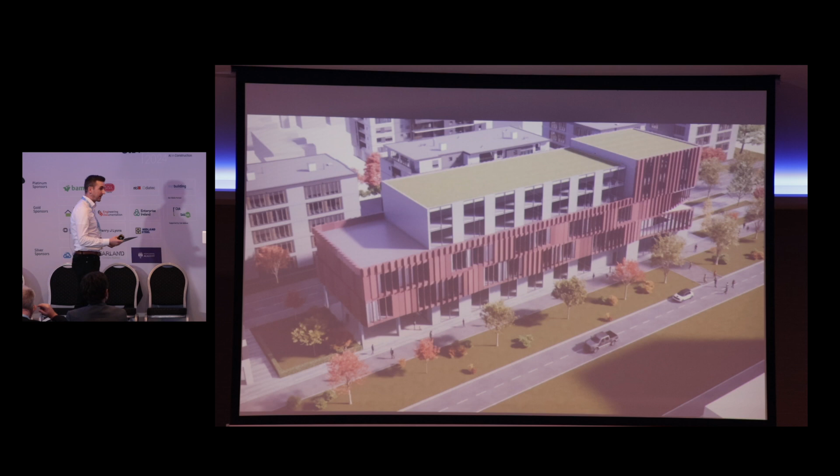The video won't play, but I'll talk over it anyway. What it does is bring additional realism to people's faces. If you're familiar with Enscape, one of my pet peeves is that people look too CGI, which makes the image look unrealistic. The AI enhancer completely changes that - it brings a complete human look to visualizations and architectural renderings. It will also do it for things like grass, vegetation, and other entourage in the image. That's just a little additional tool that sits within the Enscape plugin inside Revit.

So I'll skip ahead with that video. Now to look at some other integrations, particularly from an automation perspective but also with some AI integration - looking at other Autodesk tools like AutoCAD, Revit, and Civil 3D. You may have noticed in the last 12 months or so that they've integrated feedback - I get this email, I think on a weekly basis, telling me what tools or pieces of software I've used inside Revit, AutoCAD, or whatever particular Autodesk tool. This is something called Autodesk My Insights, and it works across those three main Autodesk tools.

Effectively, what it does is allow you to receive actionable recommendations, whether you're an architect or designer, recommending tools you might be able to use in addition to ones you've used that week. When I say tools, I mean actual functionality inside the software. It identifies different pieces of software you've used, and uses machine learning and AI to provide those recommendations at the end of your week, inside your Autodesk panel.

That's already built into the software. You'll see it appear like this when logging in - in this case for AutoCAD, for example - giving you recommendations about new tools. So that's already in the product, using machine learning and AI as well.

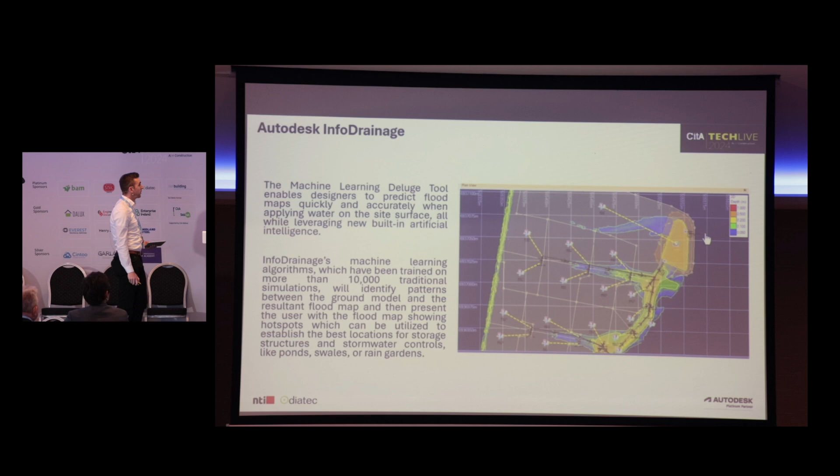Another one is Autodesk InfoDrainage, which uses machine learning in its Deluge tool. This enables designers to predict flood maps quickly and accurately when applying water on the site surface, all while leveraging the built-in AI inside InfoDrainage. It uses machine learning algorithms that have been trained on more than 10,000 traditional simulations, which identify patterns between the ground model and resultant flood map, then present the user with a flood map showing hotspots.

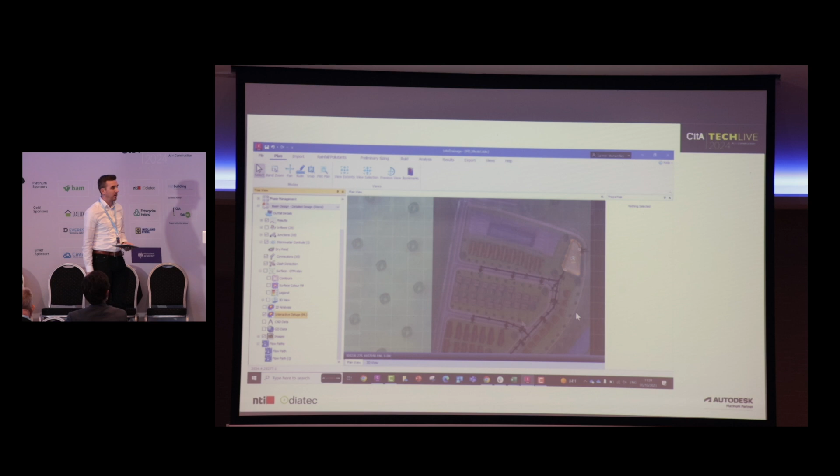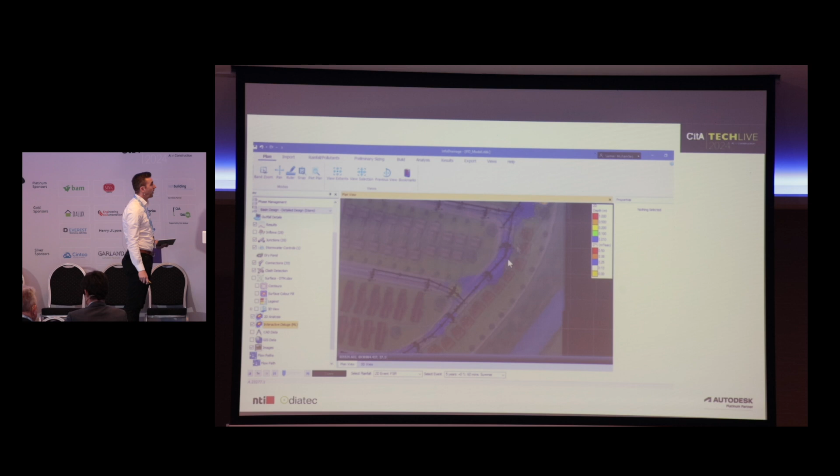So you'll see a little demonstration of this. What you have in the corner there is a dry pond, and then the interactive deluge being moved to identify the different flow of water from that. You'll see that now as the dry pond gets moved.

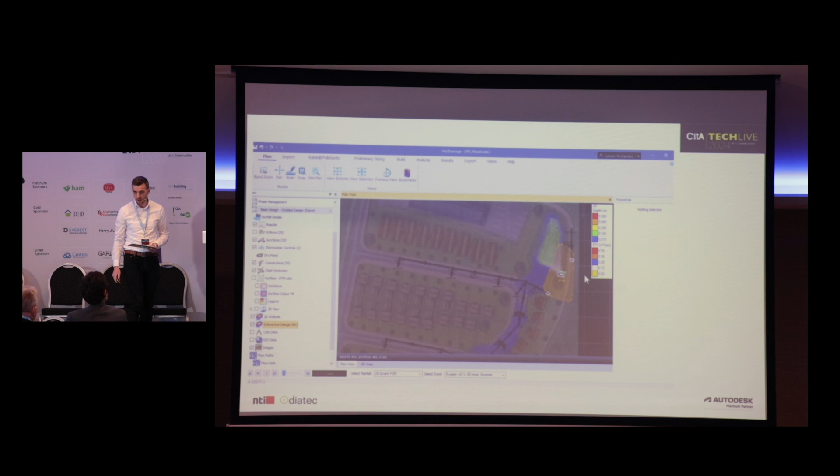So that gets moved, and then you'll see the analysis still happens on the calculation, still checking on the flood path from that particular asset or that particular area of the site. So that's inside InfoDrainage.

To go into other products then, so Autodesk Build and AI, some of the integrations in that. If you're an Autodesk Build or Autodesk Construction Cloud user, you may have seen the Photos module inside ACC or Autodesk Construction Cloud.

This uses the photo tags and AI then to automatically add tags to metadata. So what actually happens is when you upload your photographs, if you're working on an iPad on site, you're performing inspections or commissioning checklists, you're executing a form on the iPad, typing in whatever information you need, and then you add some photographs to that form.

And then now my photos are now available in ACC. That's fantastic, photographs go into one location. So on my iPad then I can access those photographs or go back into my web browser. But what actually has been added to those photographs automatically as soon as I took them, it takes a couple of minutes, it identifies items inside that photograph.

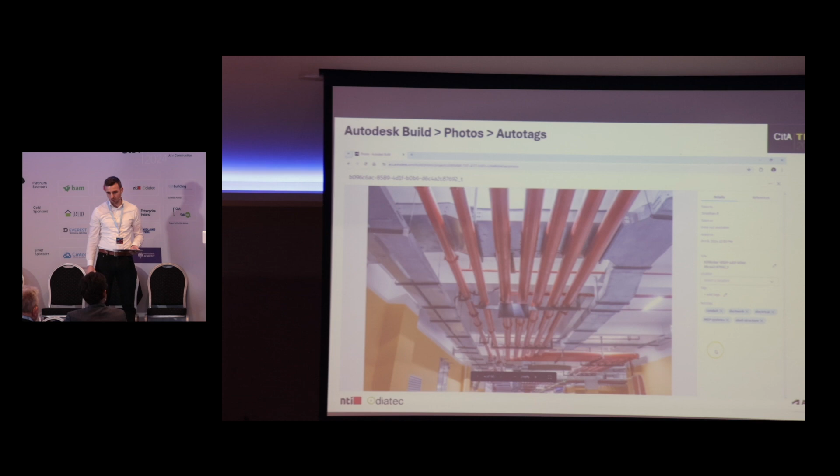So all of those tags that you see on the right hand side, they're all automatically identified from the photograph through AI. It recognises that's an opening and a window, fairly low quality image. You can see that's MEP systems, that's steel structure, ductwork, etc. So these are all the photographs taken on site via an iPad device, and then the AI recognises different parts or different elements inside those images.

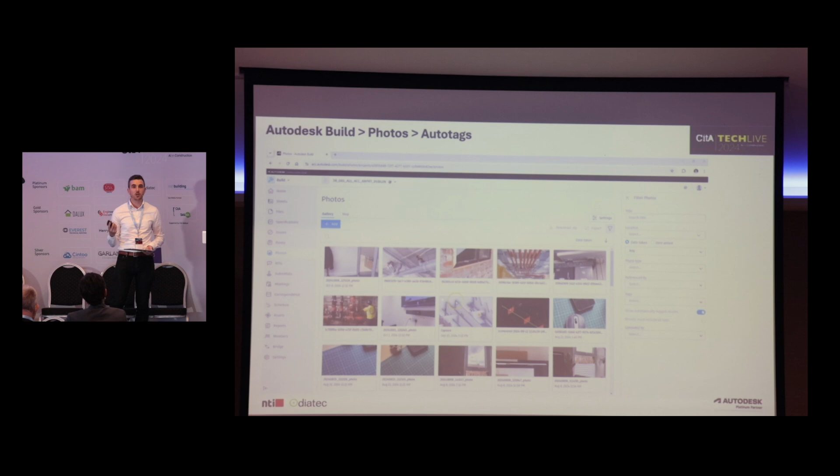What that means, great, it adds tags, but I suppose what's the benefit of that? It means then that you can actually search by those tags and search for particular items. You may be on a complex project, photographs build up to thousands or tens of thousands easily on any construction project. So then I can search by those auto-generated tags, and I can filter that on or off as well. So there it will find me those images, particularly for baseboard finish.

Or my skirting board, as I prefer to call it. So that's Autodesk Build and the photo tags, which is AI.

Autodesk Build, then Construction IQ. This has been around for a couple of years. I think it may have been mentioned possibly by BAM this morning, I can't remember. I've certainly seen BAM talk about this previously and about the benefits of this. So Construction IQ has been around a while. This is a machine learning dashboard inside Autodesk Construction Cloud.

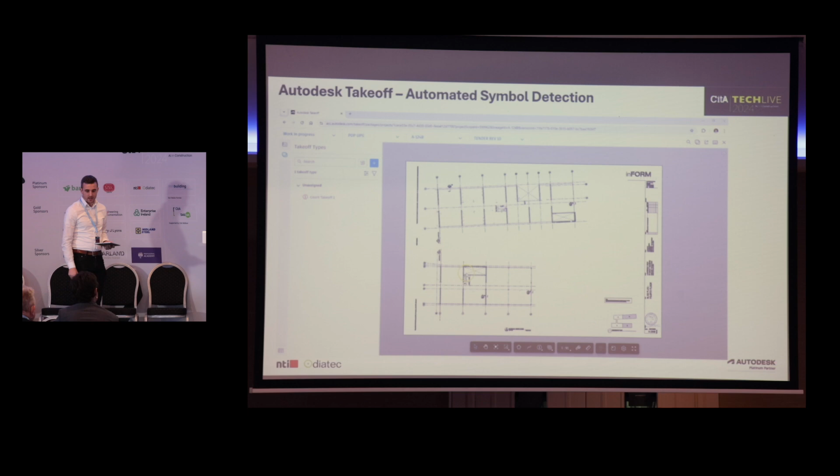Autodesk Takeoff then, automated symbol detection. So this sits inside ACC, very rudimentary in my opinion. All it's doing is scanning for symbols in drawings. But if we scan a symbol in a drawing inside ACC, the drawing sits inside ACC.

Video should play. So I'm inside my Autodesk Construction Cloud here. I've got a 2D drawing. I've got a series of symbols on the drawing. That could be a light fitting. It could be anything in the ceiling. It could be a pop-up, for example.

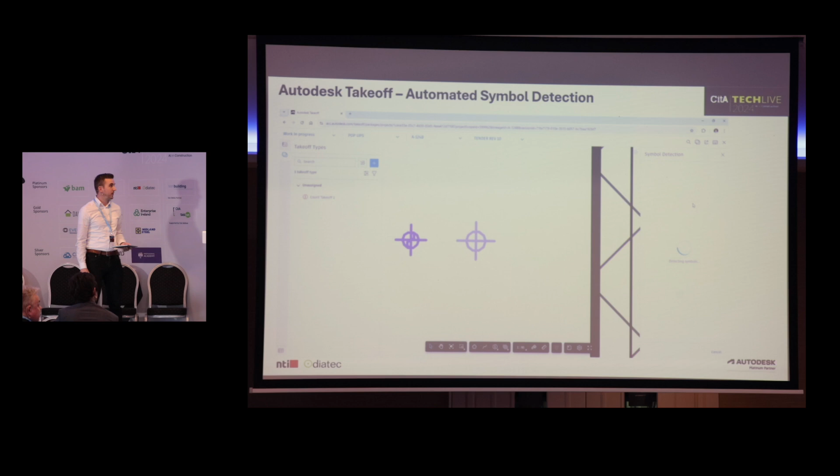I need to quantify all of those in the 2D drawing. So this is a PDF drawing, obviously you could have thousands of drawings. I just circled the symbol there, and I said, I want you to find all those symbols.

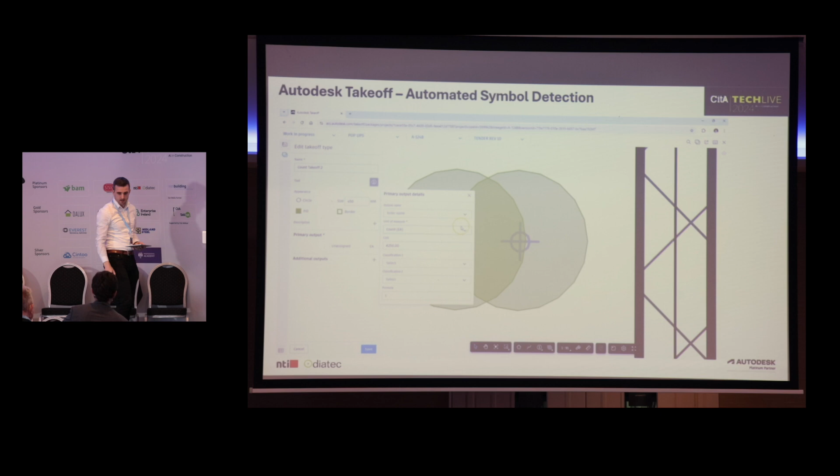So it automatically finds all those symbols, then allows me to quantify all those symbols. Again, it's scanning the documentation, and then I'm able to quantify all of those. So it found whatever number of items is in that. It'll come up in a minute. And then I can apply a cost or a rate to all of those items effectively.

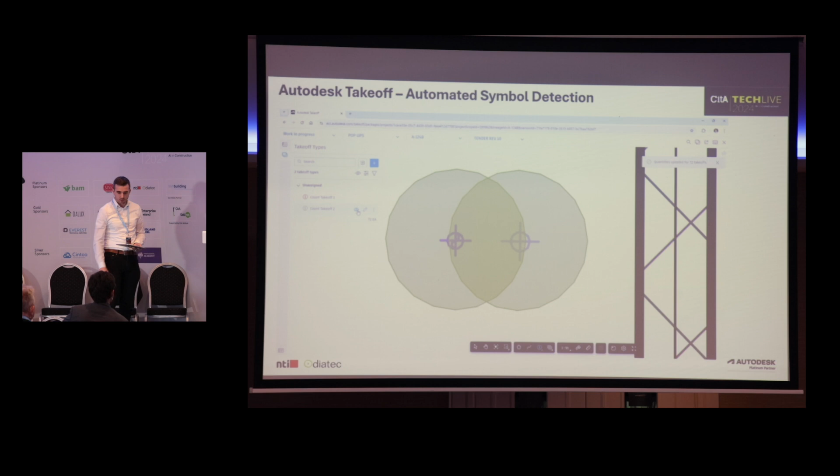Say each light or each pop-up or whatever the case is costing us 250 quid or whatever a rate is. So there I found 72 items across that drawing, and then my detailed takeoff, I'll see that on the left. So that's the output of it, of just the symbol detection effectively. And then I can see each of those individual items there.

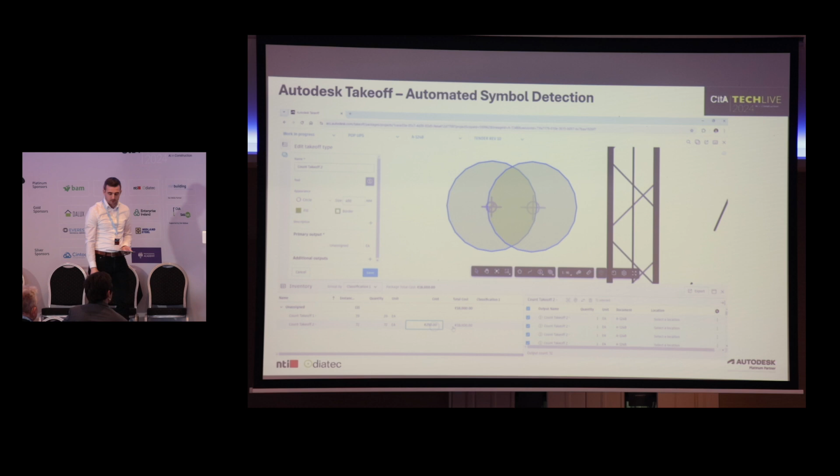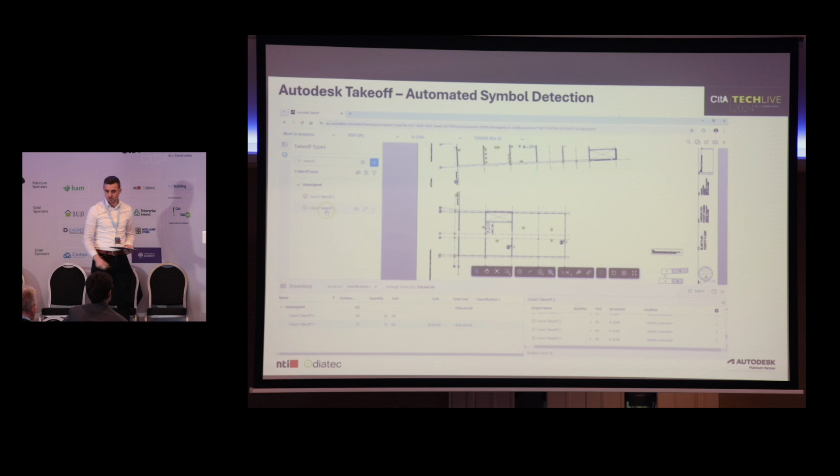If I then change the cost, so all those 72 items are costing me 18k. So if I change my rate, costs go up for whatever reason, we all see it. Costs go up, I change that rate to 270, there we go. It changes to 19,400. So that's just based on the symbol detection occurring in the first place. Then the output of how I work with that data is improved as a result through the process. So that's just inside ACC, or Autodesk Construction Cloud.

So then Autodesk Forma and AI. Some of you may have seen this. Some of this is generative AI as well. Autodesk Forma is about mass or volume, volumetric generation of geometry at an early design stage, particularly aimed for architects and housing developers as well, looking at large sites.

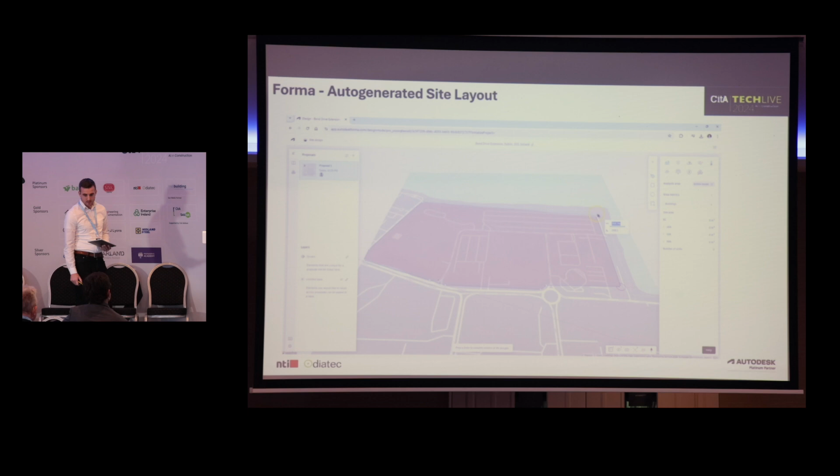So I'm just defining the boundary, just bear with me. I'm going to the top right, up to my Explore tool. I'm going to select the site. So what you'll see, I'm just making sure all my building options are turned on. And down at the bottom of the screen, what you're seeing in real time is different options being generated. Roughly there, we're seeing 24 options being generated in a matter of seconds.

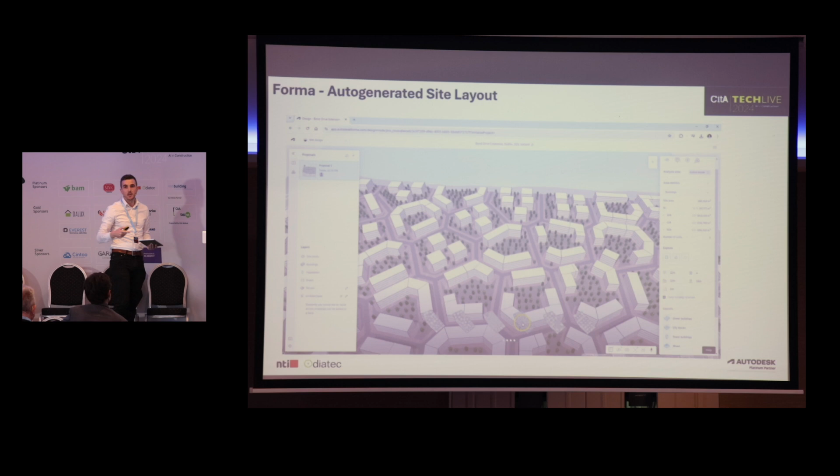So I'm seeing the roads layout is defined in those parameters on the right-hand side. I can say it's a 12 meter building to building distance. I can say the depth of my building block. I can choose my slightly more interesting building blocks rather than your grid system. And I can cycle through those different design options and change the parameters on the right-hand side. These can even be things like tree distance or tree density, or different building height parameters as well.

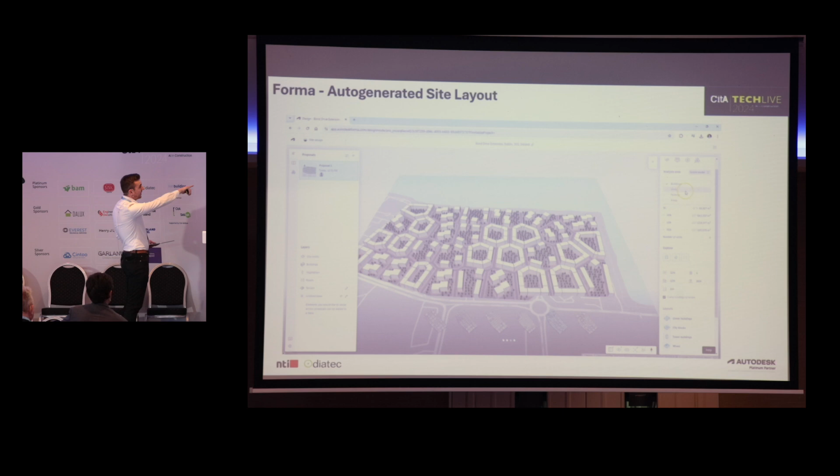So then I can immediately see, by cycling through my options, my gross floor area of a development in a matter of seconds. All you need is your site address and your site boundary, really, to generate that. You could also pull in a surveyor's site boundary from a CAD file as well. So then I can alter some of those options.

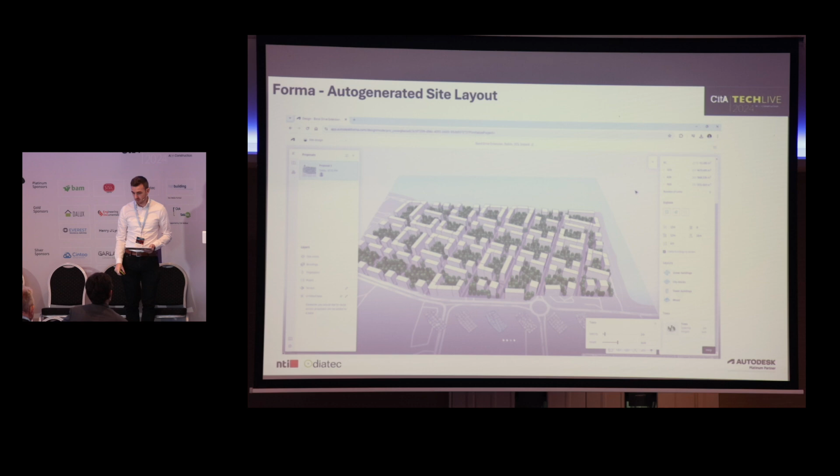Changing the building height, for example, changing the tree density, the distance from tree to tree as well. I think it's good to certainly add in as many trees as you can into a site. We probably don't see enough of it. So the more we can do that at early stage certainly enhances the overall design and ideally the outcome.

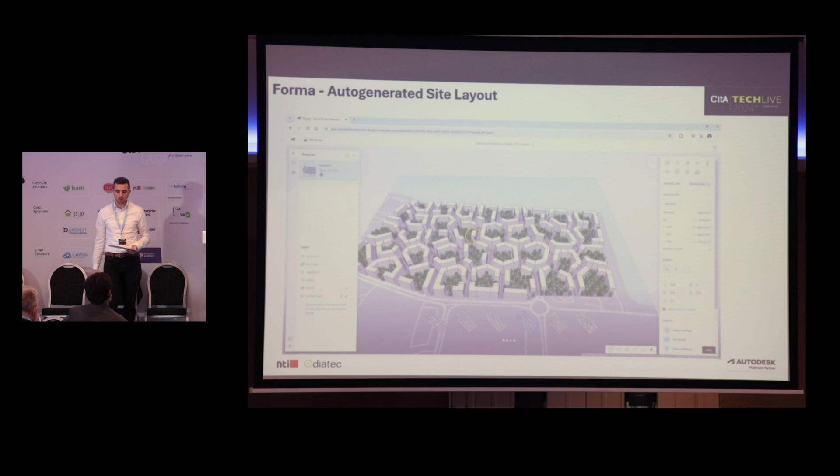So then again, the outcome of that generative design process is I get all of my floor schedules, all of my counts, all of my unit counts across my entire site as well. How many apartments, how many student res, how many houses can I actually fit onto that site. So again, as I change the parameters on the right-hand side, the 24 options at the bottom of the screen update as well, so I can cycle through those again.

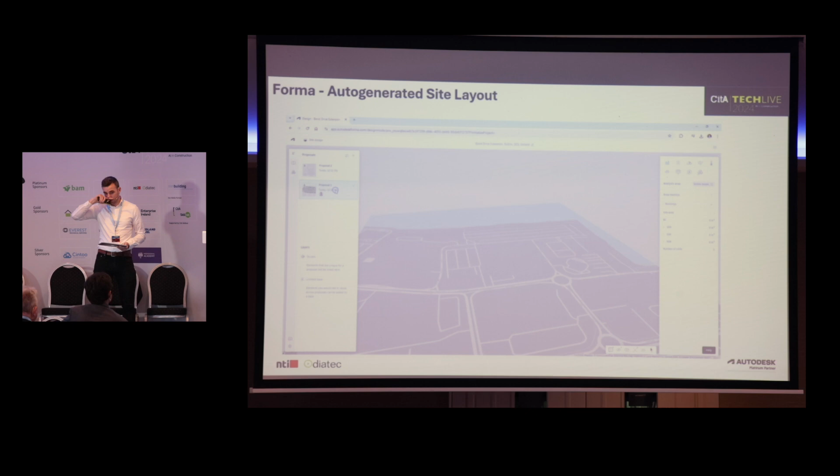And the 24 options are fitting in those parameters on the right-hand side. So let's say I like that as option A. The property developer goes, well, I want to see option B, and then all I'm doing is showing some further efficiencies inside Autodesk Forma, outlining a floor plan, for example, that I can work on.

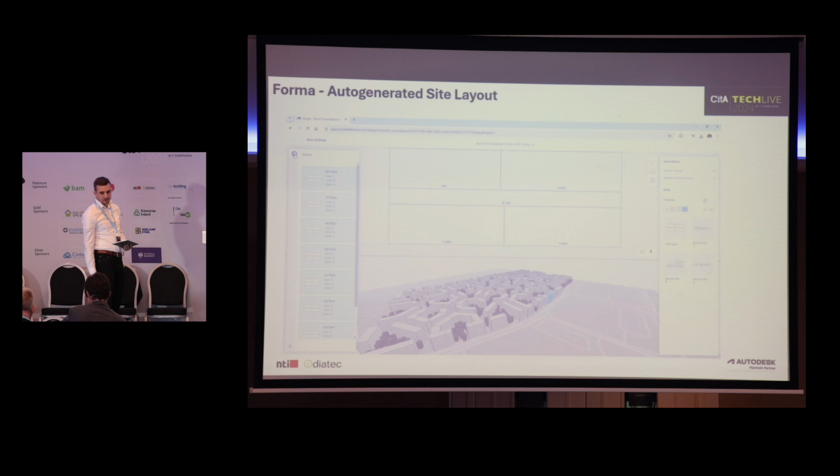As part of that model generation, all those volumes or masses are generated, and I can now apply a floor plan across those as well, using the floor plan tool inside Autodesk Forma. Let that play for a minute, so I can replicate that floor plan across all my buildings, and then generate additional design options in an option B effectively, giving those counts, those numbers, of what we can fit onto that site as part of that generation. That's auto-generated site layout using Autodesk Forma.

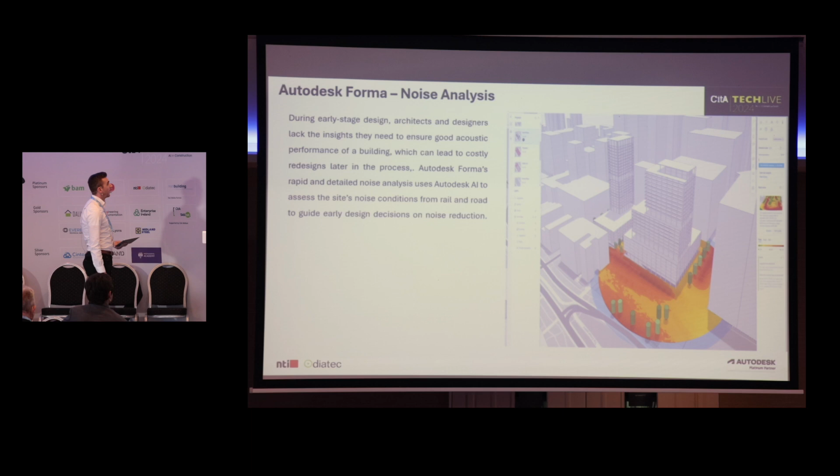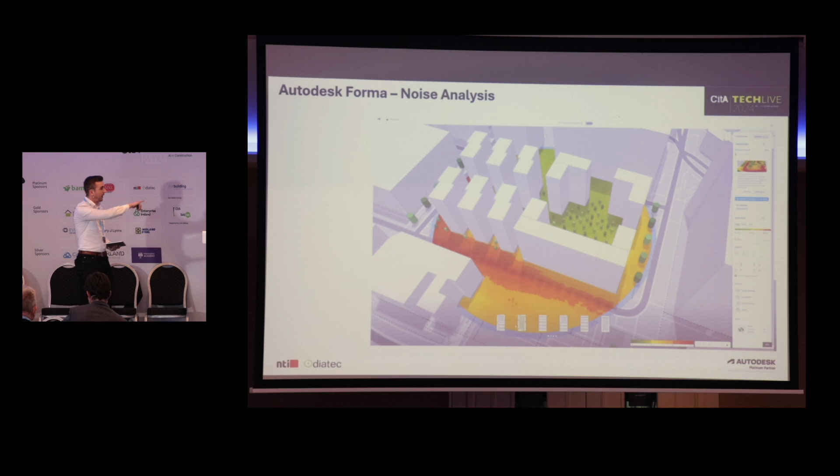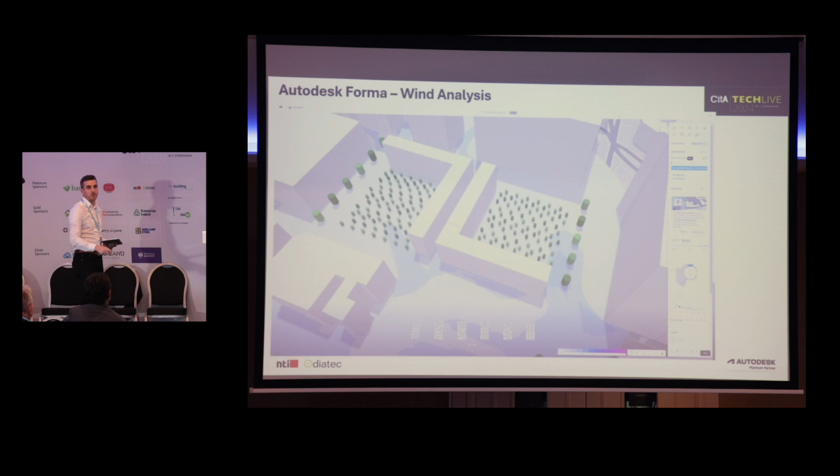So that's in-product stuff that you have access to if you're one of those software users in Forma, in Revit, in Enscape, in ACC. You can go into work tomorrow and start using that if you haven't seen it already. That's in-product, available now. And I think someone mentioned earlier that AI isn't just about replacing jobs or roles or tasks. It's actually about being assistive in those small parts of a business, an organization, a workflow, and I hope that's come across.

So just to finish off, some other ACC integrations I've seen with ChatGPT, and some of you may follow this guy—I certainly can't take credit for it. This guy on LinkedIn, Anthony Sertorio from Autodesk. I asked him kindly for his permission to use some of these workflows in my presentation, and he kindly said yes.